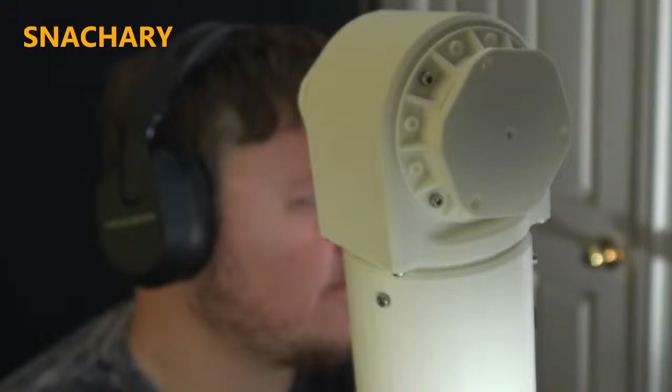That's looking pretty cool, actually, and it's working for the most part, except I think I printed the wrong part, and I'll show you why I think that in just a second. So, if we take a look at our model here, I added this hatch, which is on the real one, and let's see. I wonder if there's any other smoking guns that we printed the wrong part.

I'm gonna open it up real quick. I just assembled it off camera because I need to get moving on this, you know? Let's see. All right, so let's open it up real quick.

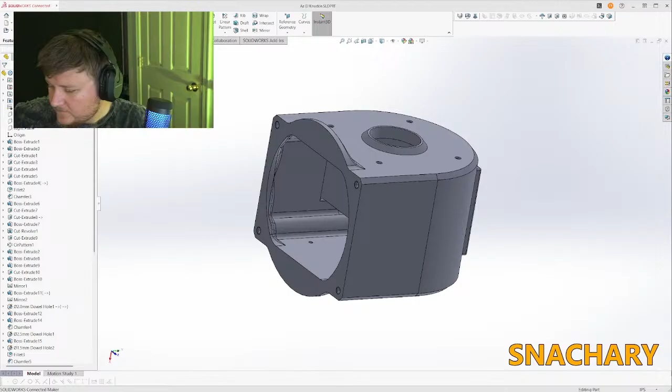I have this Kobalt bit set from Lowe's, and it comes with a ton of little bits. Honestly, it's not good. The bits are poor quality. The sizes are all strange. So I have a bunch of metric hardware, and obviously there's SAE and metric hex fasteners, but for whatever reason, none of the Kobalt bits fit the metric hardware that I have. So I'm going to be looking for another bit set. I probably have several other bit sets, but I'm gonna have to upgrade here.

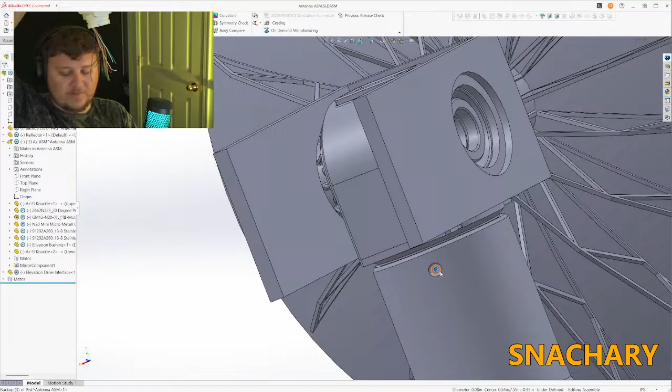Okay, so what I'm doing is I'm loosening the 3 set screws that are on the side, and then the top should just, here, let's go. So I'm loosening the set screws in the side here, which at some point we're going to need to reprint the pedestal anyway, because this one doesn't have the missing tooth. Okay, so with those 3 set screws removed, that thing just pulls off.

Let's go back to this one. You got the ring gear in there, and that lip underneath the ring gear prevents the spur gear from falling down. And then we've got our whole assembly going on.

So that center motor is a 16 RPM 12 volt motor, and at 9 volts, which is what I'm using to test on the bench here, it is not strong enough to move even the axis without any arms on it. So I started freaking out, thinking I made a big mistake, because the spur gear, this little guy here, I can't stop that with my hands. It's crazy strong. But the azimuth axis, which should be a higher gear ratio and more torque, in actuality it's really struggling. So I took it over to the benchtop power supply and bumped it up to 12 volts, and then yeah, we got some more power out of it.

But what it had me thinking about is, in the future, instead of directly driving these axes right off of the gear train itself, I might need to just copy the entire geometry of the azimuth axis with the little spur gear. I mean, that's the way it is in real life, so it makes sense. I don't know what that is. Actually, I do know. We do know what that is.

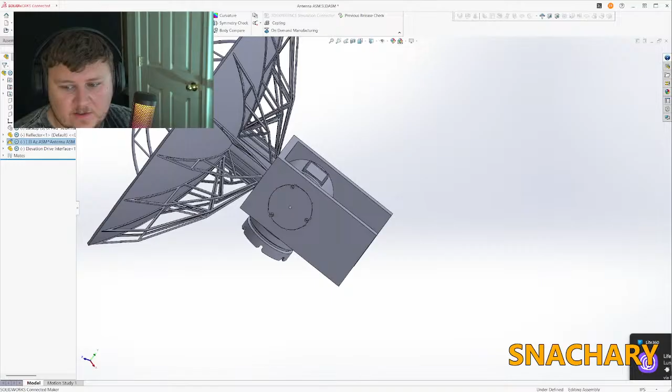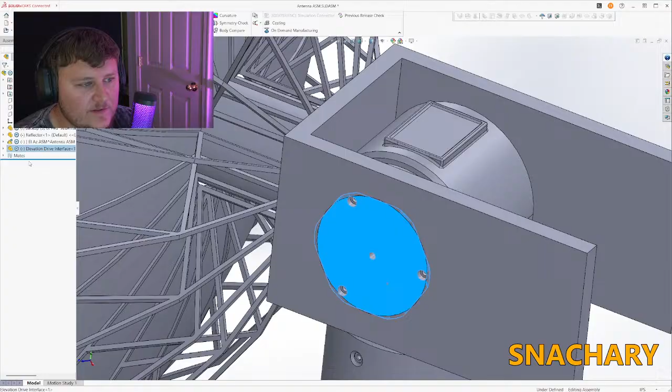And I think what I want to start with is these arms. So the reflector itself, I might just have to call that good because we're running out of time. But these arms, we need to change some stuff about those. They're ugly. And they don't interface with our drive, what do we call this? Elevation drive interface. So we should have a mate in here that we can suppress that's keeping it from moving. There we go.

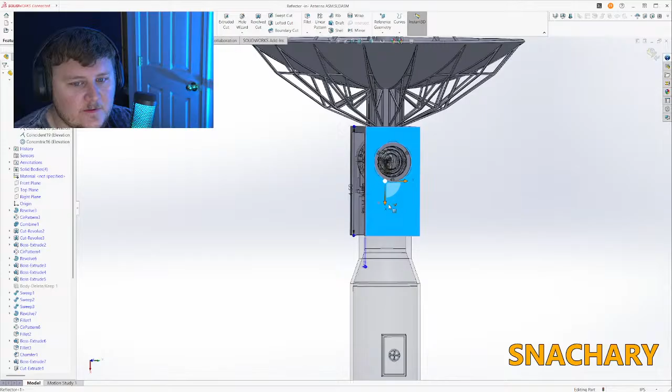So one thing that happened is I made this section of the elevation knuckle a little bit taller so that we would have a full circle for our bushings here. And as a result, these arms now look a little bit weeny. So we're gonna extend those, I think is probably step one. Crazy how I drew this. That's ridiculous. That looks pretty good. Let's see if we can bring our reference photo up here. It's not bad.

You know, something I am noticing though is that the pedestal is a little stubby. But maybe I want it to be. It's not an exact copy, right? It's just a reference. Okay, so I like the distance on those arms. Let's add our interface features.

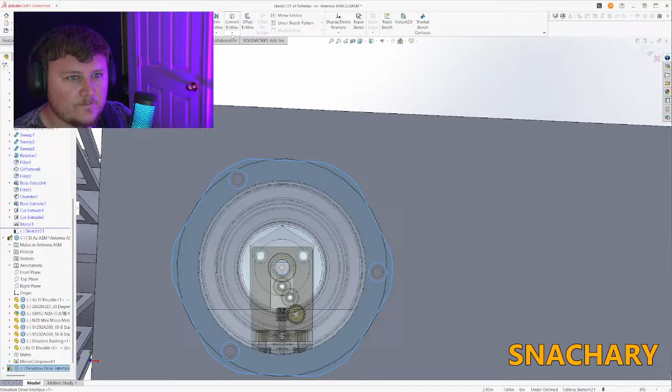So all we did was we took the face of our plug here, because if you remember, we're going to slip the yoke around this and then attach the yoke by pressing our piece. So this will be the outside. Why did I decide to do it that way? I don't know. I like overcomplicating things, apparently.

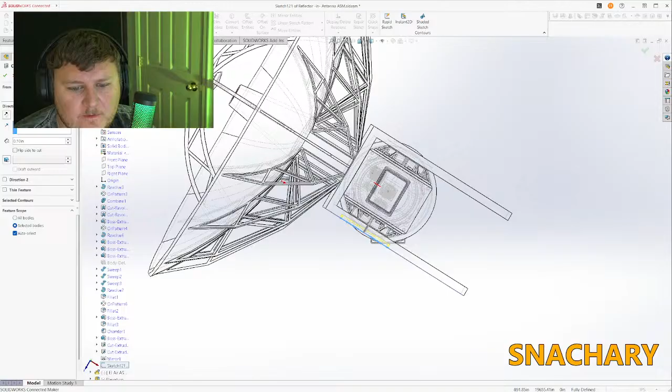And then I think I made that 0.125 deep, which should be sufficient clearance. It might be too much clearance, to be honest. We'll find out. Yep. So we'll press this into the side and screw it in, and it'll interface with our, okay, but that's only an 1/8 long. Give me a sec.

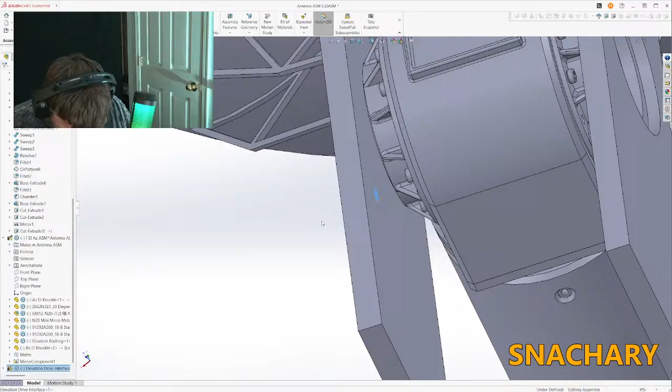So the issue is I don't want the screws to poke through at all, but if they are going to poke through, I don't want them to poke through much. So the screw that I have, the total length on it is 23, which should be perfect. That'll mean that it doesn't poke through.

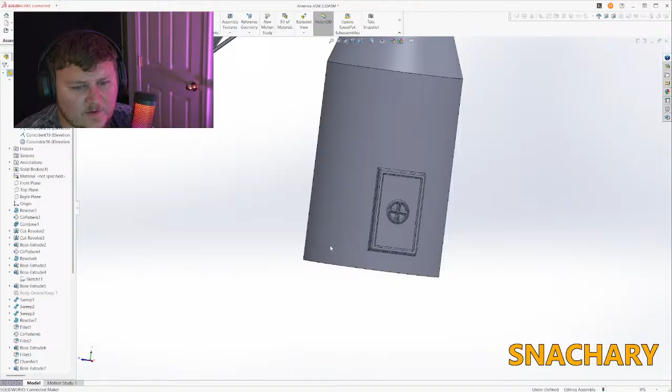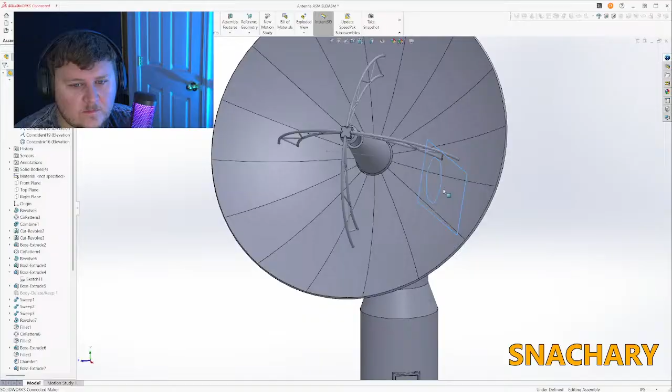So I believe, if I remember correctly, the hole that we use for that is 1.5 millimeters. And this allows the plastic to deform enough for that screw to thread in. Okay, that looks pretty good. Now, let's look at our ref again. It's got these weird boxes and stuff. That's all RF equipment. We should make a couple greeblies.

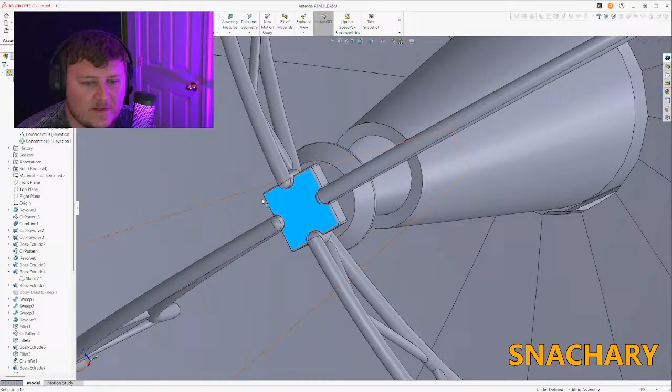And then we kind of need to figure out, I guess we'll have to do the center of mass by hand. And then we got to figure out how to attach the dish to this yoke, because right now they are not attached to each other. And then we got to figure out how to actually print this. Like, there's a lot to do. I don't know why I made this a separate part. Maybe for printability.

Alright, what do we want to do next? We need to make a configuration that is complete, which is this one. Yoke arm, which will, wait, why isn't that part of that thing?

Perfect. There's a yoke arm assembly configuration. And for the reflector, we will delete the yoke arm.

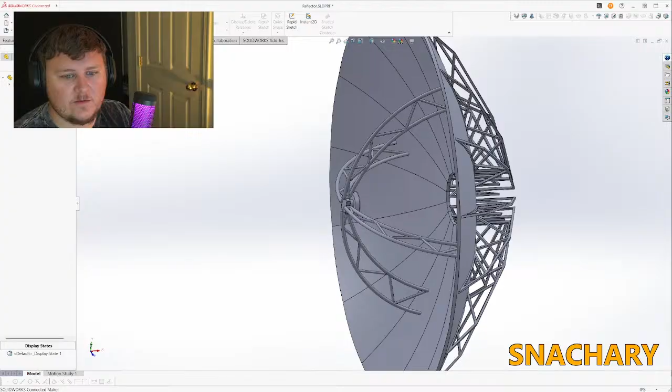Okay. Before we screw around with the yoke arm too much more, we need to start printing the reflector, because that's going to be huge. That's going to be a really big part, and it's like the most important part, right? It's not an antenna without the reflector. You don't recognize it as such. So I think the reflector itself is probably done, but let's see. I'm printing something else right now, and I need to make sure that it's gonna finish.

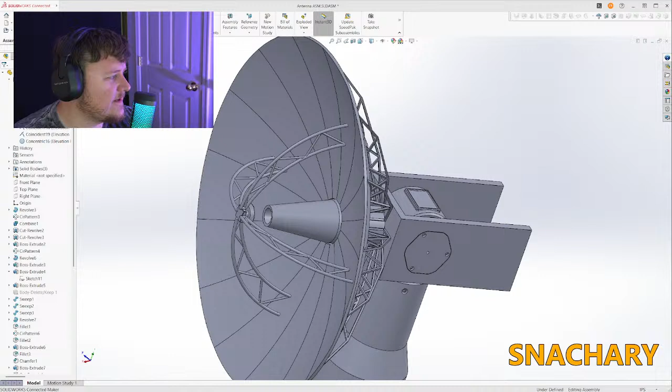We're using carbon fiber PETG, and it's coming out really nice. Yeah, it looks really good. Okay, so we'll wait for that to finish, obviously, but let's talk about how we're going to connect our reflector to the yoke arm, and then how we're going to print it.

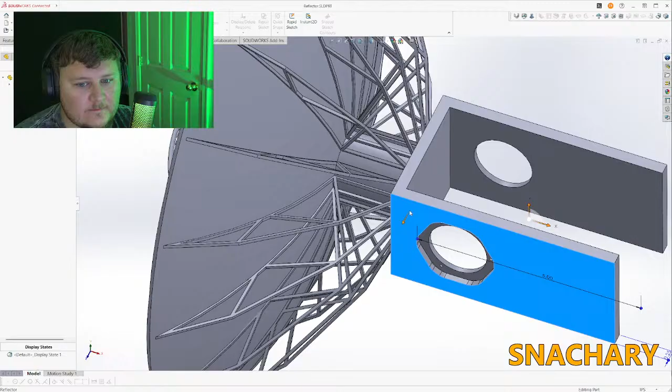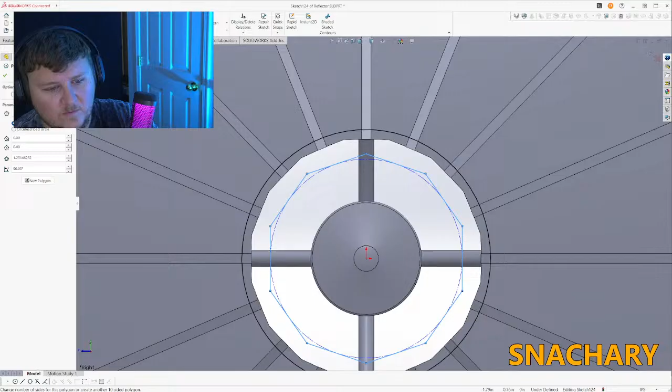So first of all, I want to tie all these struts together because I'm afraid of them breaking. And then what are we gonna do with that? We're gonna do this. How many sides did we do on the reflector? We didn't do 10, right? One, 2, 3, 4, 5, 6, 7, 8, 9, 10, 11, 12, 13, 14, 15, 16.

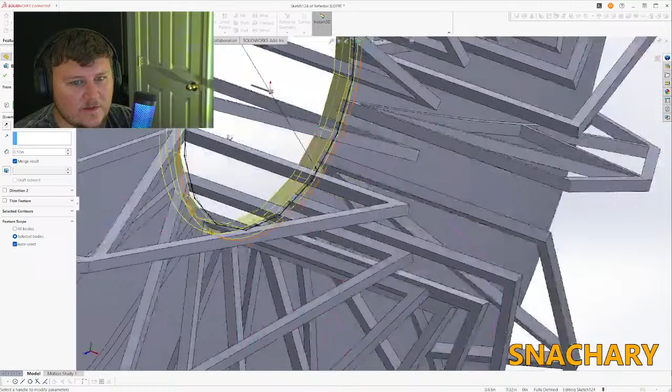Okay, so that'll let us keep our faux paneling thing going on, but we can have a round feature on the outside. Yeah. Man, there's a lot more scaffolding that goes into that. We're gonna need to do that.

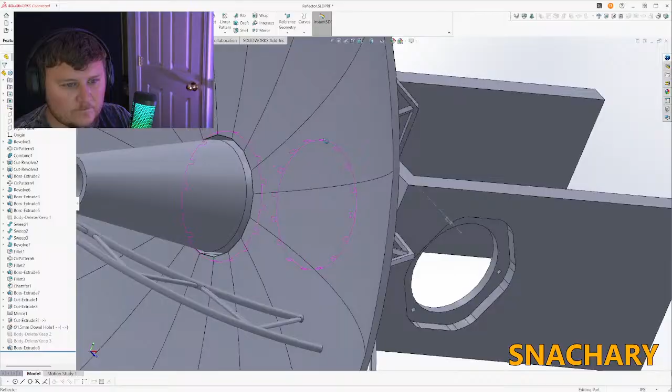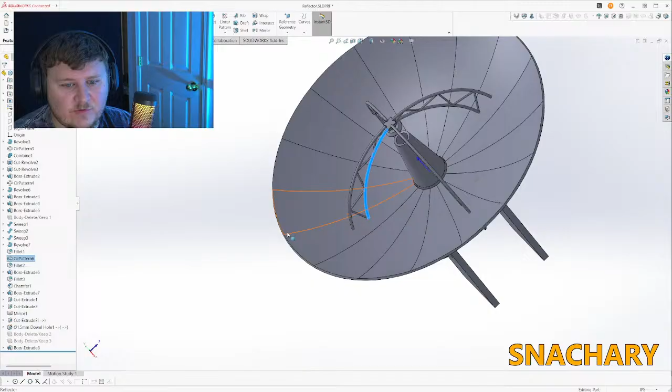Okay, that doesn't work quite as I expected it to. What I want to do is essentially like socket the whole antenna onto there. Boom. Just slide it on. And maybe I don't hate this actually. You think it could print at 20 degrees? Because if we could print it like this, nah, then we have all these panel lines. I don't know. Should these be separate pieces? Would it make it easier to print? Not sure.

What is this? A mirror of what? What is this cut extrude? I know that I want to mirror those features. Weird. Got a little distracted there. Sorry about that.

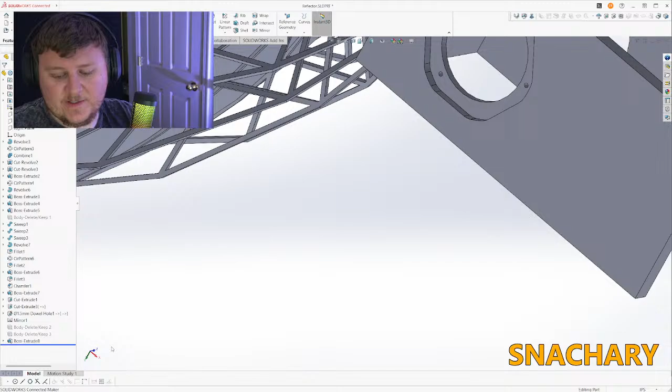So again, if we're looking at the antenna now, it'll more or less print like that. But let's look at the ref again. It's got so many... I think there's a brace at every one of these junctions, so maybe we need to draw that, and that'll help me. That's going to be a 3D sketch, which will be fun.

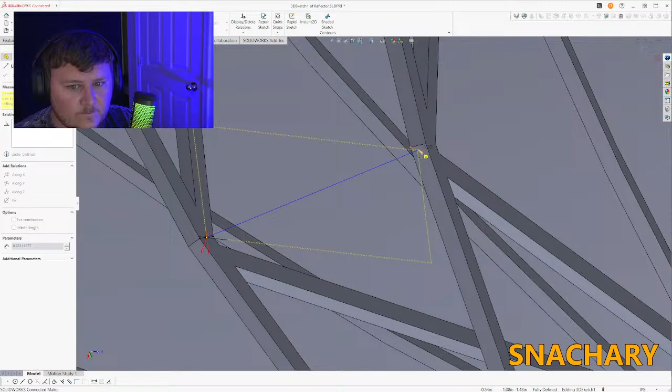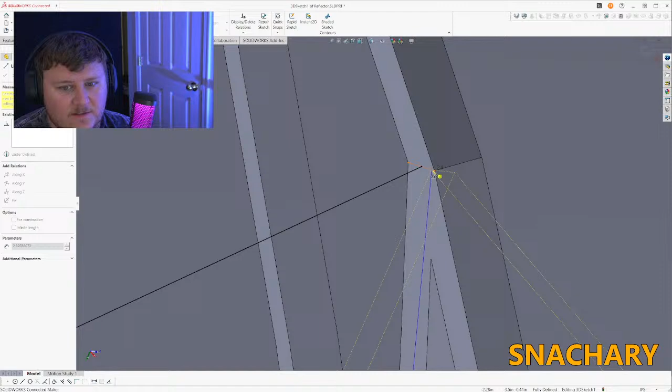So they let the water out into the river in the town that I'm in, and that is usually really gross because the river hasn't flowed all year, and then it just pushes all the crap down as it's going, it's got this huge head of nastiness that comes down. So I haven't been to go see it.

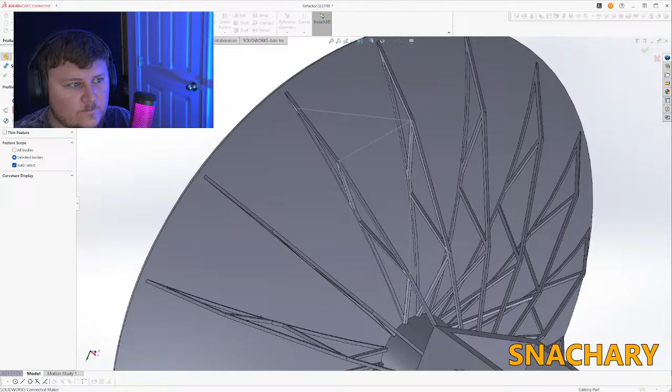Let's see what that looks like. Okay, so unfortunately, I think this is gonna be the best way to do this. Oh man, we're gonna have to do a bunch of sweeps.

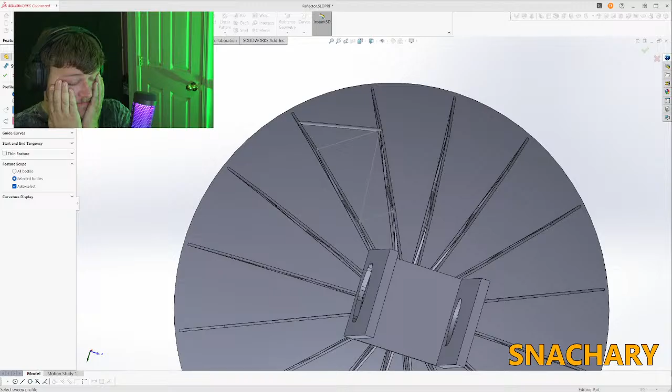This is a part of the project where it's just, oh, maybe it's because I took some allergy medicine. Now I'm all tired. What should I listen to? What kind of music should I be listening to?

So I guess I could spend some time and actually learn how to use this tool. That might be the responsible thing to do. But alternatively, I could just wing it.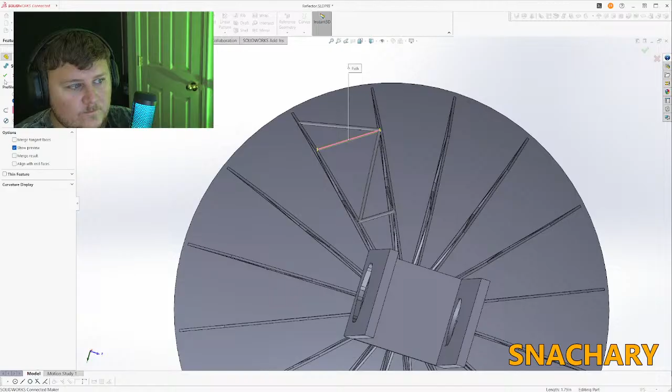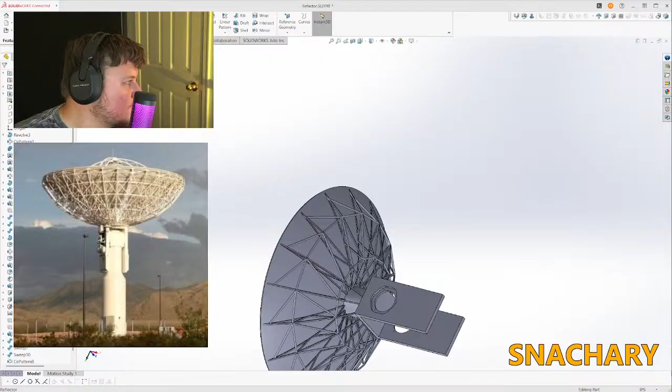Okay, how's that look? And then we take all of these, we pattern them 16 times. Let's check that out. I'm not loving that. Let's edit our sketch here. I think I know what I need to do.

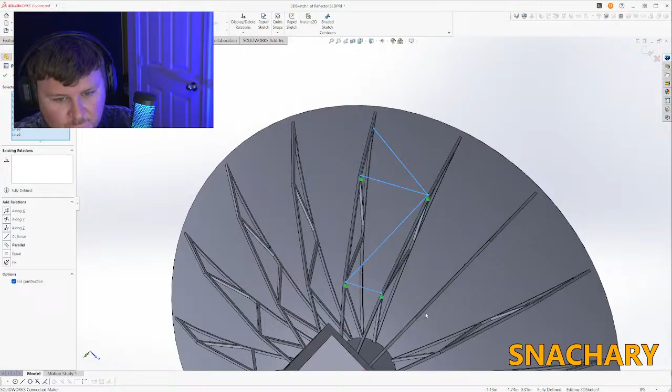So this point needs to come up to this point. And this point needs to come up to that point. This one to that one. Why is that not letting me midpoint that?

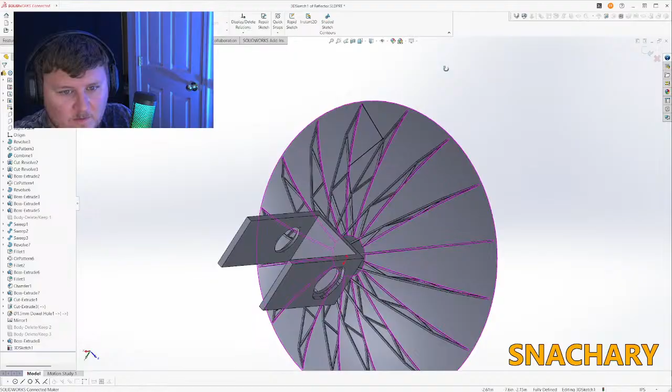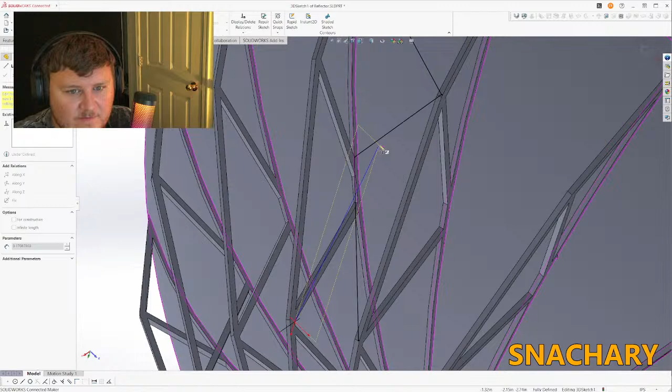Let's start over. Okay, so we can come from this point to this point to this point, back up to this point. Let's try that. I don't want it to get too busy, you know? That could be bad for the aesthetics. Let's see what that looks like. Wait, what happened to my sketch?

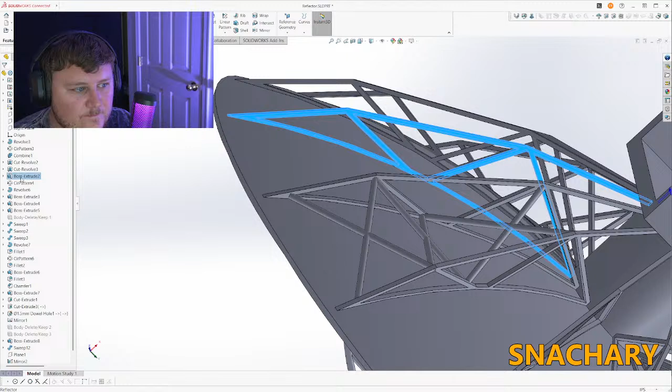Okay. And then I should be able to insert reference geometry plane. Jeez, excuse me. Okay. That's the midplane there. We'll take this, we'll mirror these bodies. Is the problem that these are square and these are round? How bad is that gonna mess us up? Oh shoot, that's terrible.

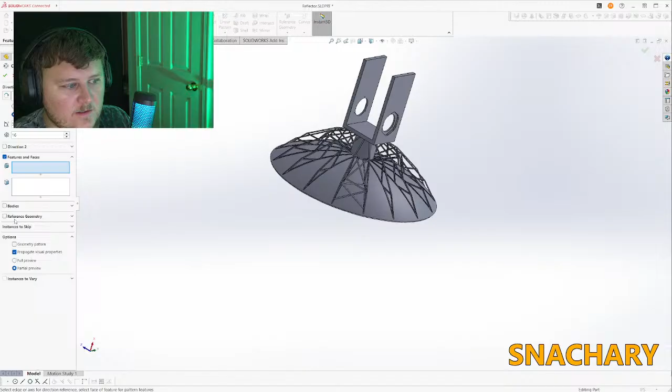No, because in real life, some of it's square tubing, some of it's pipe. It looks like I'm missing something right in the middle there. But you know what? That's enough to drive the point, and I'm not going to overdo it. I think that that looks so much better. Oh heck yeah. That's it right there. That's gorgeous. Okay, so before we do all that, I noticed that this doesn't extend enough.

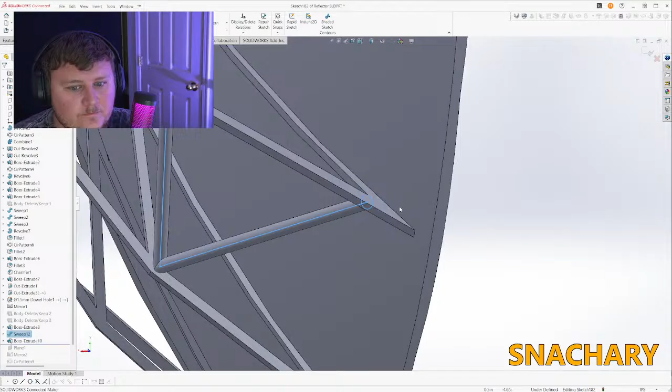Okay, so a lot of these bodies are not connected, but at the end we're going to combine them all, and that'll be good. So if we merge the result, it just freaks out because half of the body's in, half the body's out. And we want to grab all of the bodies. This is not the right way to do things. Like if I was designing this as a product, I wouldn't do this, but this is a desk toy. So you get what you get.

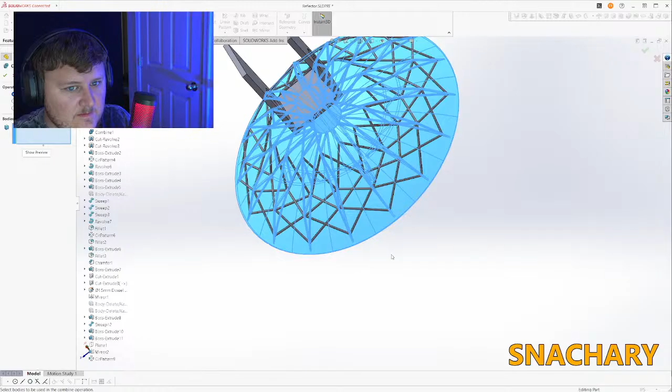Okay. And then I want to combine this with this. How about everything, and then take this one away and this one. Ready? Cross your fingers. Whoa. Oh, it worked. Look at that. Now the dish is one solid piece, and you know what, it looks freaking dope. I love it. But we need to move these body keeps and deletes well below that.

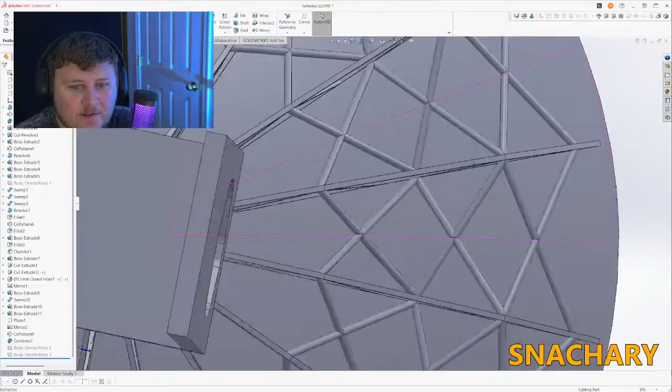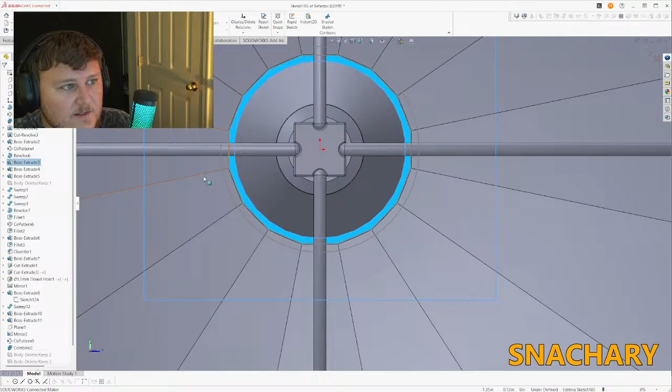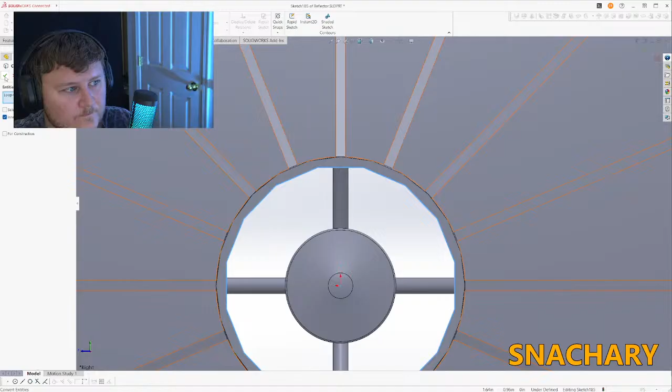Okay, now I think we're done with the reflector. Let's work on how we're going to interface it to the yoke arm. Man, we could almost just take, we have this other boss extrude. That's not the one. This one. So we could just take an offset. Apparently that's not a chain. Okay, perfect. And then we can offset this 0.125 to the inside.

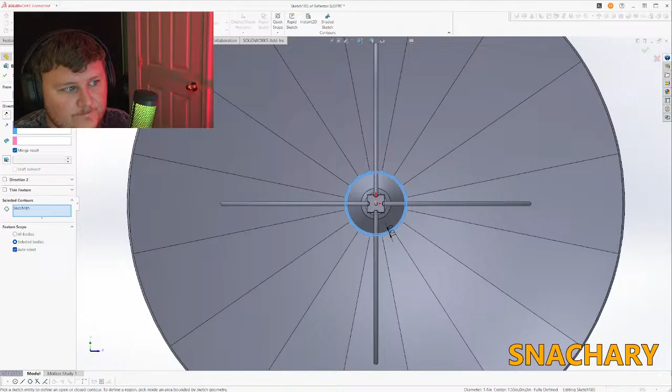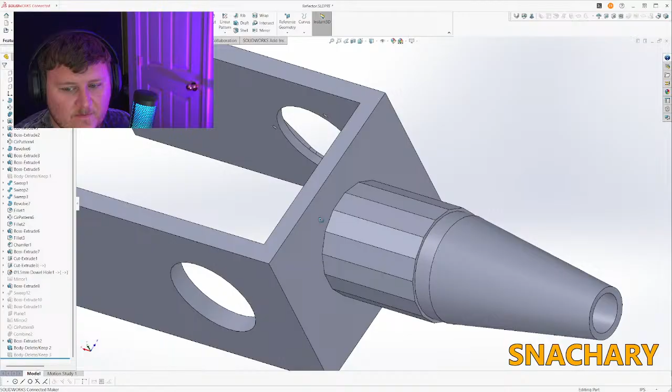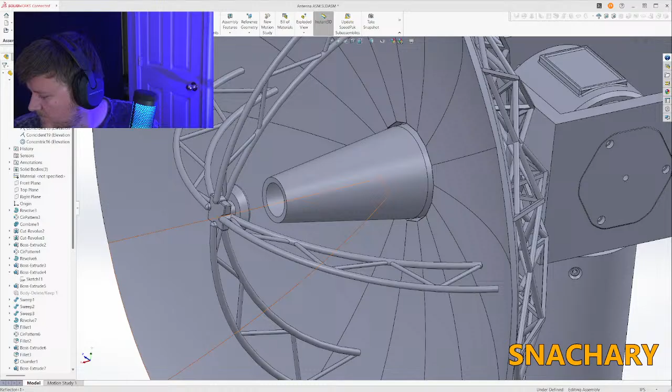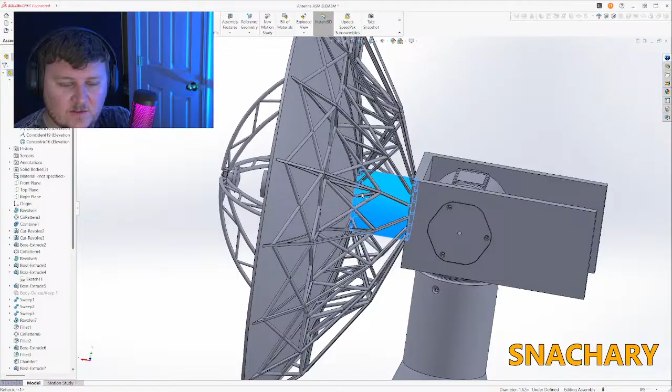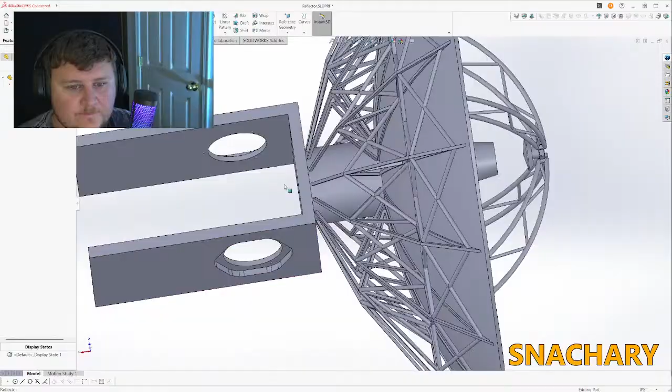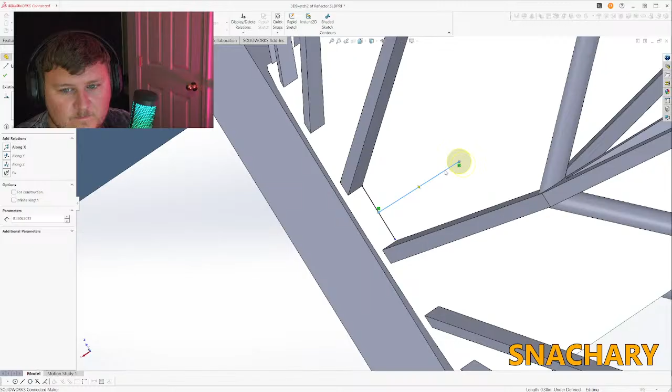Okay, so the whole dish is gonna slide down on top of this feature, and I say we just lock it in with like another set screw type situation. And I think we were running those at 2.5 for a clearance. I really honestly think one will do it. We should dimension it at all. Okay, so that gives us centering between two of the legs, and then just an arbitrary

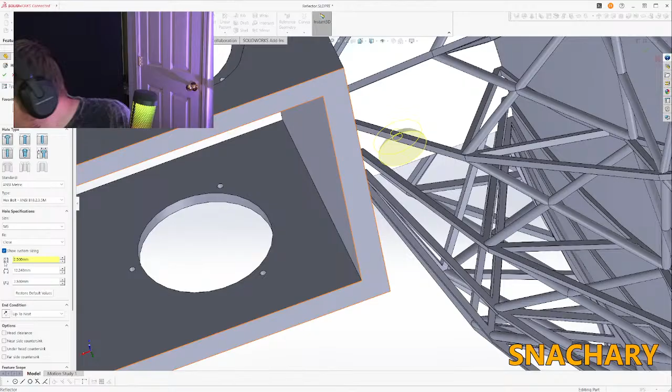Okay, so this actually shouldn't be a clearance hole if we're gonna do that. I think it was 1.5. Let's see. So that was 1.5. Get my screw out. I think it was 1.5 for the shaft. The head at 3.6. 4. And then the head depth.

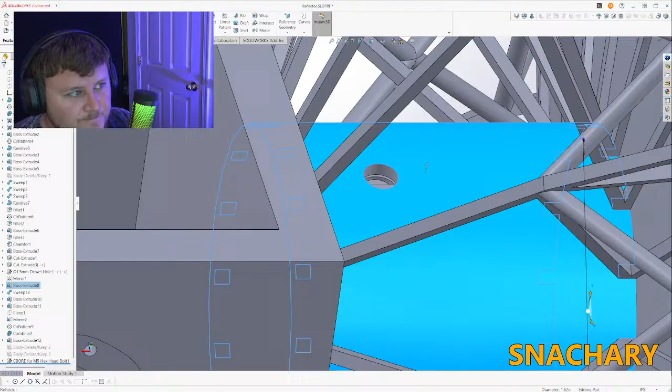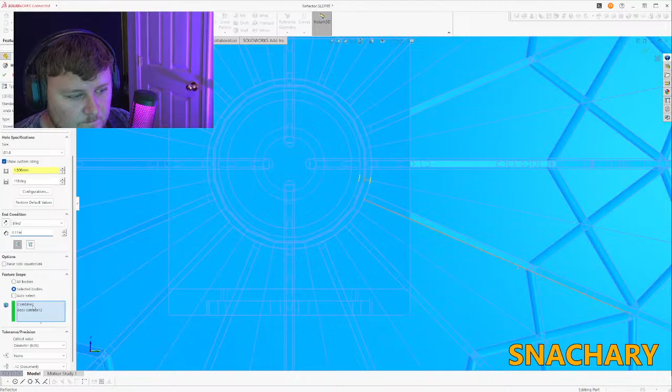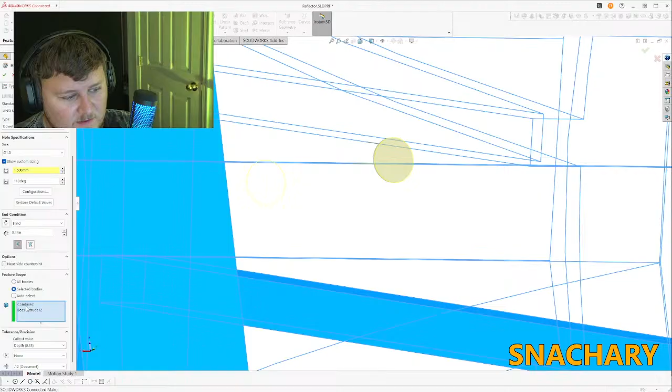Oh, that's not that thick. In that instance, then it's just going to be the 150. And then what is that? What in the world is happening? Oh, because I made that. Blah, blah, blah. Because it's relevant to all the bodies, and we only want our dish bodies. Okay. That'll work. And then we can circular pattern that.

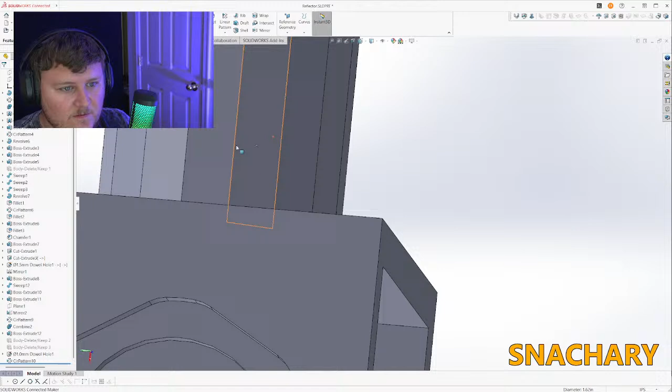Three times. Done, right? Well, no, because 16 is not divisible by 3. But it is divisible by 4. Okay, and then like an idiot, these are all on the points instead of the flat spots. And they will be no matter what. So I say the dish itself is finished. Let's export it and try to figure out how to slice it.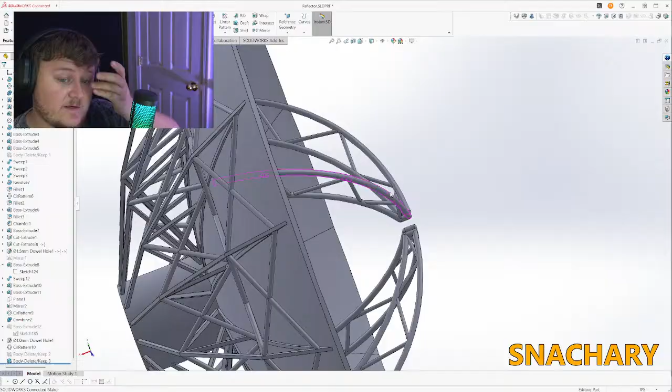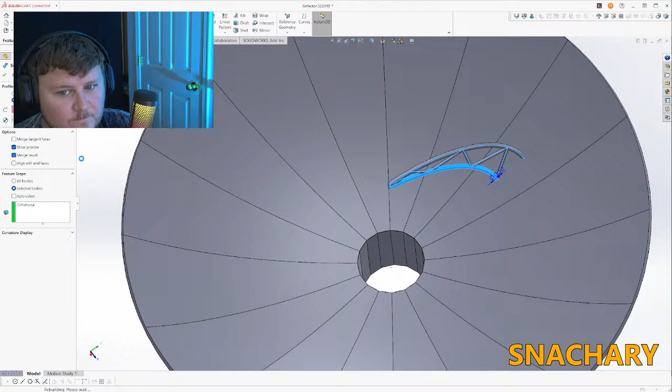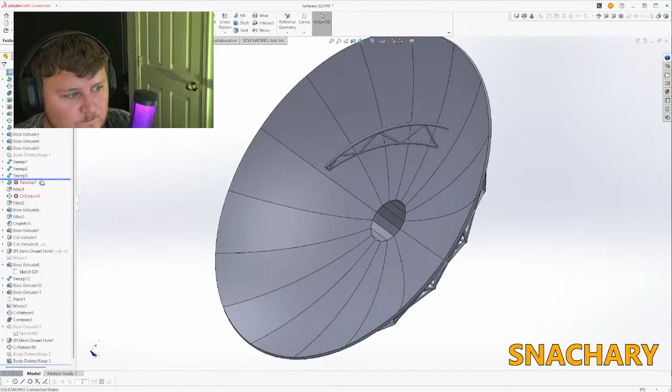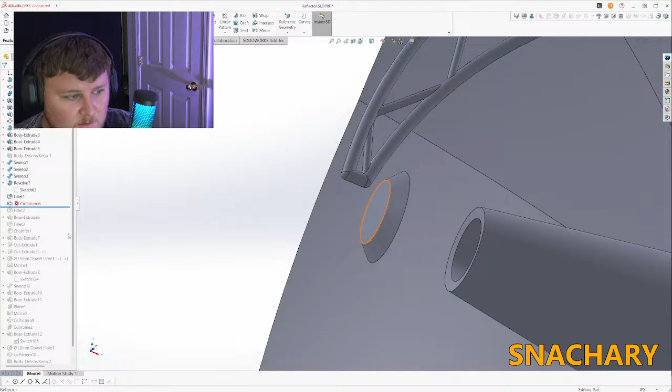Okay, so that's our reflector and our quadrupod, which I think the quadrupod parts are going to be easier to print if they're not attached to this. So we're screwing up. Are we screwing up? Must this revolve? Hmm. Okay. Okay. All right. Okay. I think we fixed it.

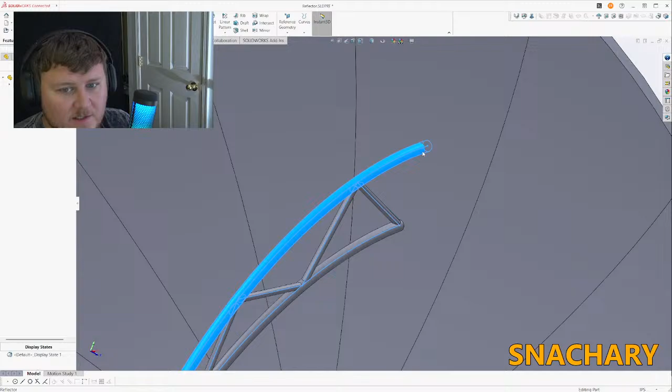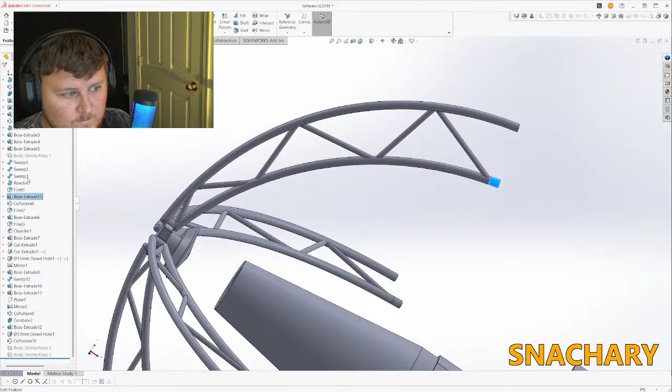Okay. So there's the reflector. But we need to make some provisions for the quadrupods now. Okay. So if we can make... There's our quadrupods. That goes in just a little bit, that goes in just a little bit. So

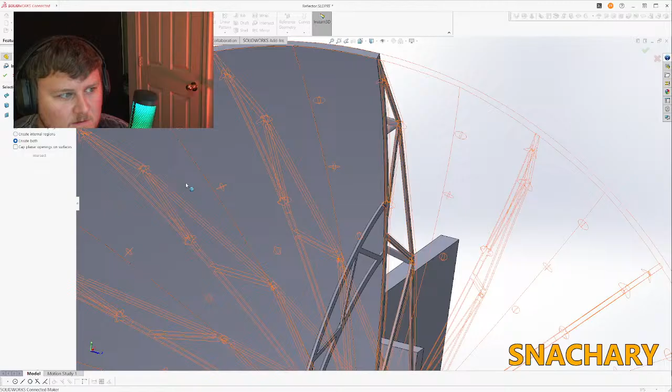Okay, now let's see if we can do an intersect. Or I have an idea. Let's just use the part itself. We will just select that one.

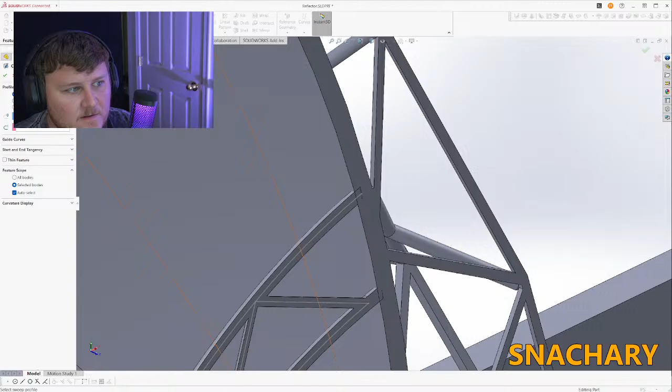Okay. Oh, I need a swept cut, not a swept boss. Boom. Circular profile. Selection manager. Boom. There we go. And we'll do 1.1125. All right.